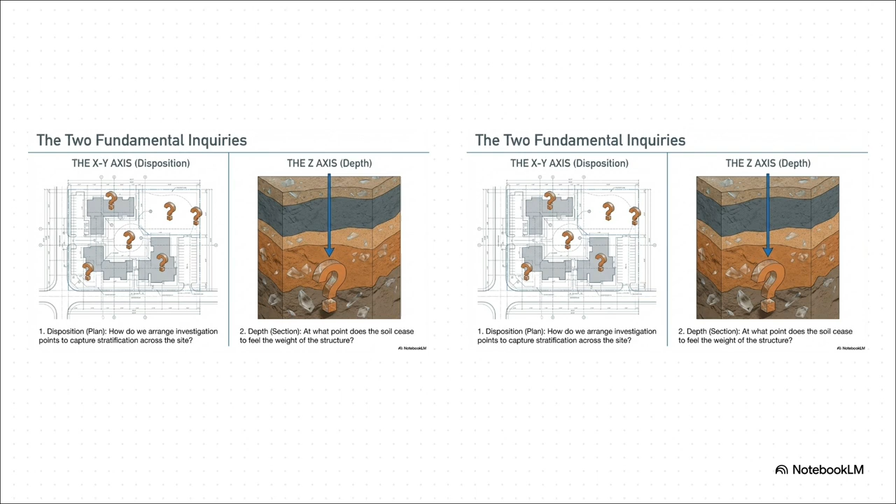And this is where the standard just brilliantly cuts through all the complexity. It boils everything down to two basic questions. First, you've got the XY axis, which is basically the bird's eye view of the site. Where exactly do we look? And second, there's the Z-axis, the cross-section view. How deep do we need to go? Simple as that.

So here's our game plan for this explainer. We're going to follow that exact logic. We'll start by defining the problem. Then we'll tackle the XY axis to figure out where to investigate. After that, we'll get into the golden rule for the Z-axis to see how deep we need to go, check out how that works in the real world, and finally, pull it all together in a super useful tool I'm calling the Investigator's Matrix. All right, let's get into it.

Just remember, we're taking what seems like a complex, three-dimensional geological puzzle, and we're breaking it down into a super manageable two-step process, location and depth. First up, let's talk about the surface plan. So this first part is all about strategy. This isn't just about digging random holes and hoping for the best. It's about being smart and placing our investigation points based on the specific type of project we're working on.

Now, for a small site, like a single house, the logic is really clever. Sure, you put one investigation point right in the center, where the main load is going to be. But you also check the corners. Now, why would you do that? Well, you're looking for any sloping or dipping soil layers that could cause some serious stability problems down the line. It's a simple but crucial check.

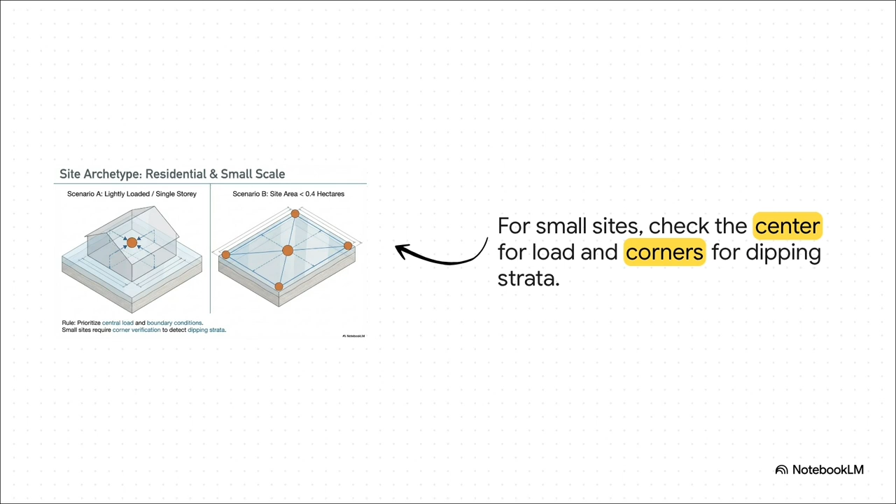Okay, so as the site gets bigger, our strategy has to scale right up with it. For these large developments, think big apartment complexes or industrial parks, we switch over to a systematic grid pattern. This makes sure we get full coverage, with boreholes no more than 50 meters apart. The whole point is to create a reliable underground map and avoid any nasty surprises hiding between our test spots.

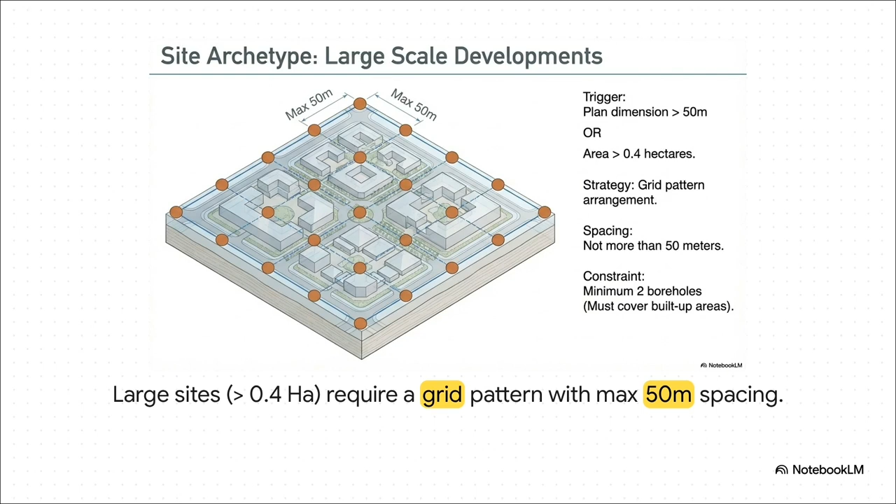But what happens when we start building up? Well, the risk just changes completely. With high-rise buildings, the loads are absolutely immense, and they're all focused on a small area. So, once a building gets taller than 50 meters, the standard says you need a minimum of 3 boreholes. This isn't just about covering the area, it's about data redundancy, making dead sure our understanding of the ground is rock solid.

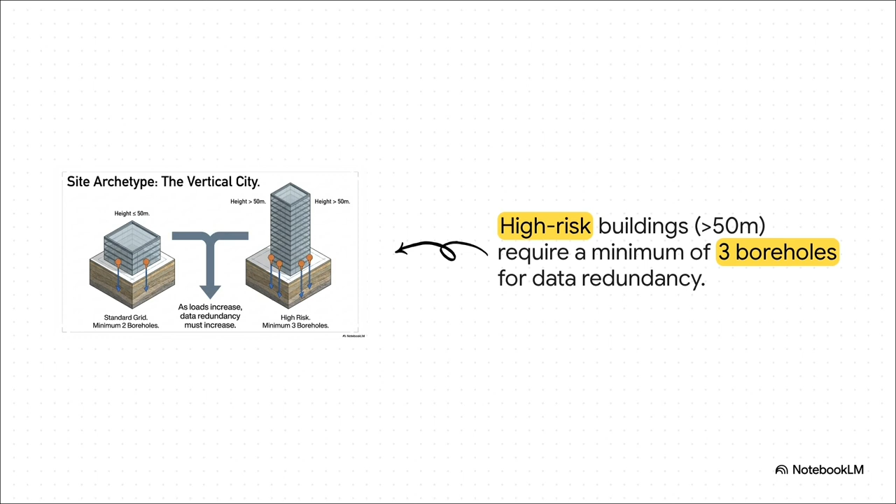Now, projects like roads or railways are a whole different ballgame. The investigation has to be adaptable. You see, if you're on nice, uniform ground, you can space your points out, maybe up to 500 meters apart. But the second you hit weird or tricky terrain, you have to tighten that spacing way up, sometimes down to just 50 meters, so you can track those changing ground conditions really closely.

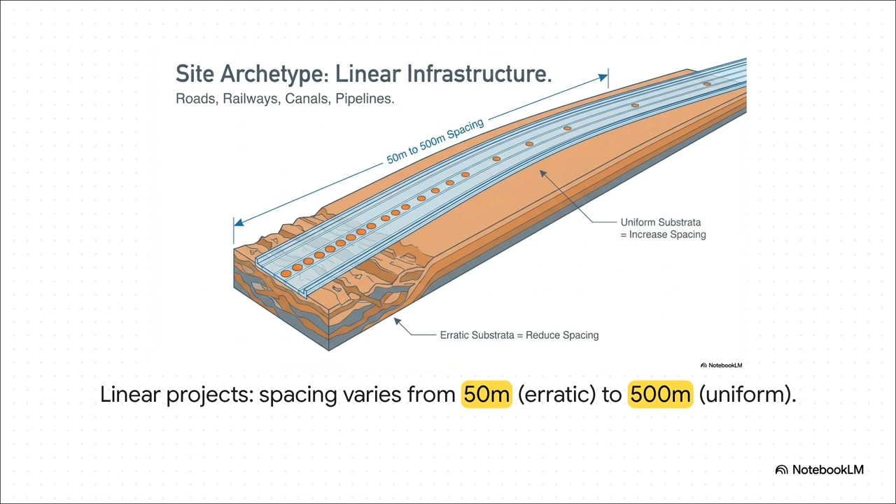And then you have these special cases, like huge solar power plants. Here, the strategy shifts again. It's really all about the massive area they cover. So the standard uses a density rule. 1 borehole for every 2 to 5 hectares.

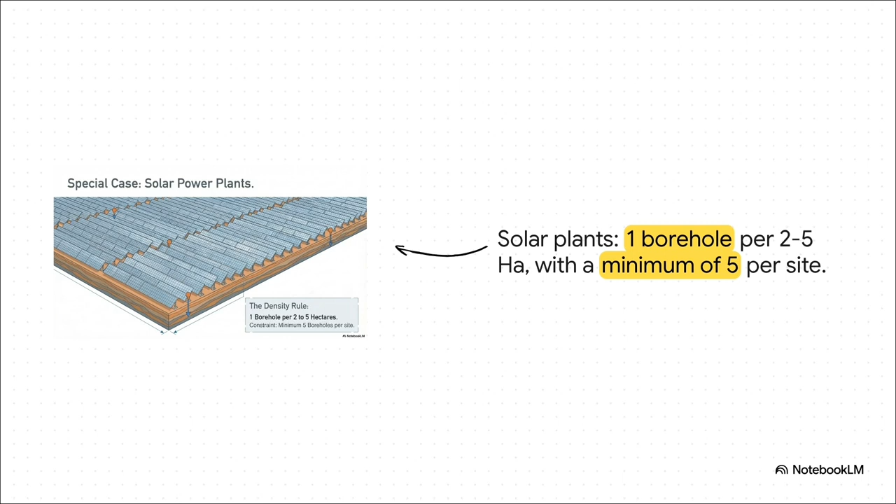But, and this is super important, there's a non-negotiable minimum of 5 boreholes to make sure you have a good baseline understanding of the site. Okay, so we've pretty much mastered the XY plane. We know exactly where to put our drills. Now we have to pivot to that next critical question. Once we start drilling, when do we stop? How deep is deep enough?

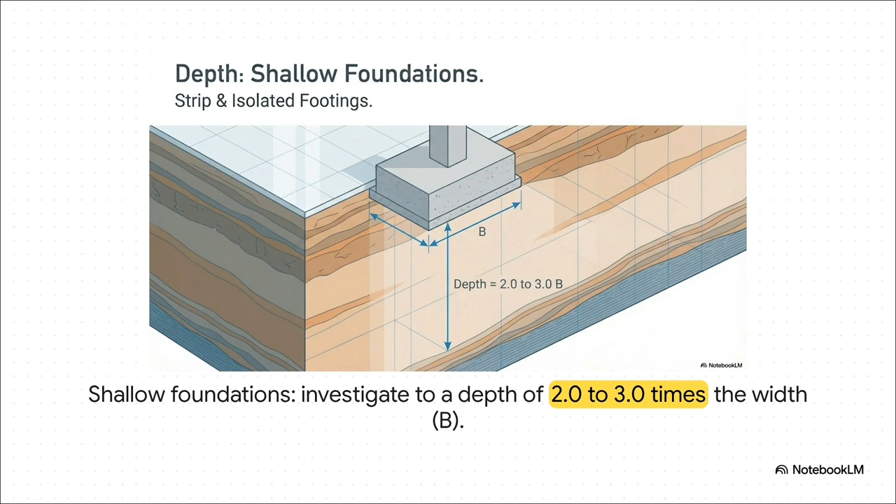So, that's the theory, which is pretty neat. But how does it actually work in the real world? Let's take a look at how this rule translates into some simple, practical guidelines for the most common types of foundations. So for the most common kind of foundation, a simple shallow footing, the rule is really straightforward. You just take the width of the footing, we call it B, and you investigate to a depth of 2 to 3 times that width. That's it. It just makes sure you've explored that whole pressure zone for that specific foundation.

Now, when we switch to a big raft foundation, that spreads the building's load over a much wider area, so the ratio changes. Because the stress isn't as concentrated, that pressure bulb is proportionally shallower. So for these big rafts, the investigation depth is usually just 1 to 2 times the raft's width.

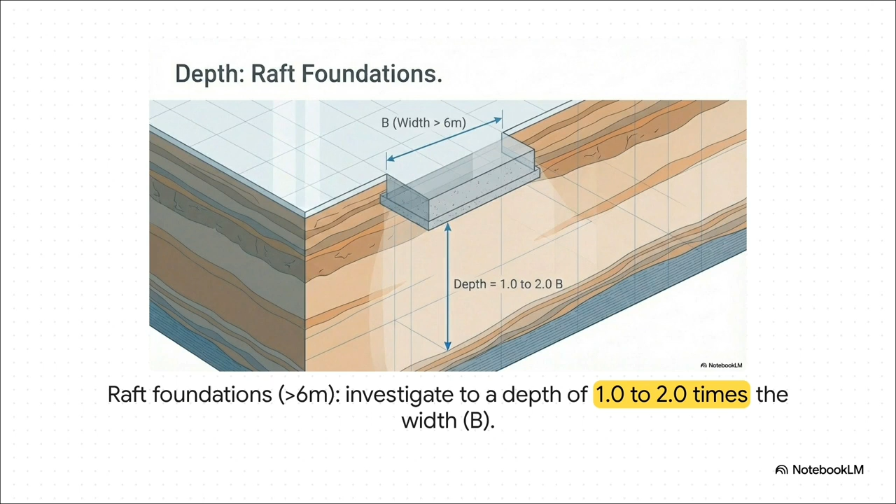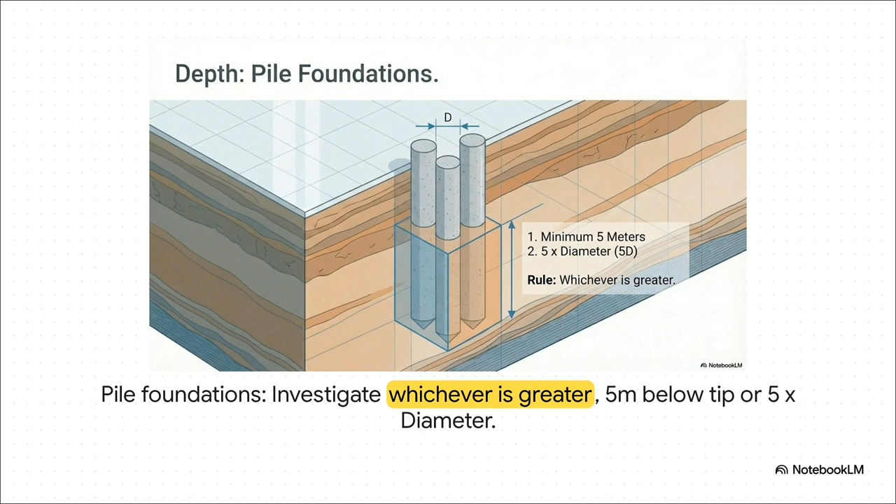Okay, now for deep foundations, like piles, which are designed to transfer loads way down to stronger soil layers. The rule is all about making sure you know what's below them. You have to investigate to a depth that is the greater of 2 options, either at least 5 meters below the tip of the pile or 5 times the diameter of the whole pile group. This makes sure the piles are actually resting on something solid and not just on a thin, strong layer with mushy stuff hiding right underneath.

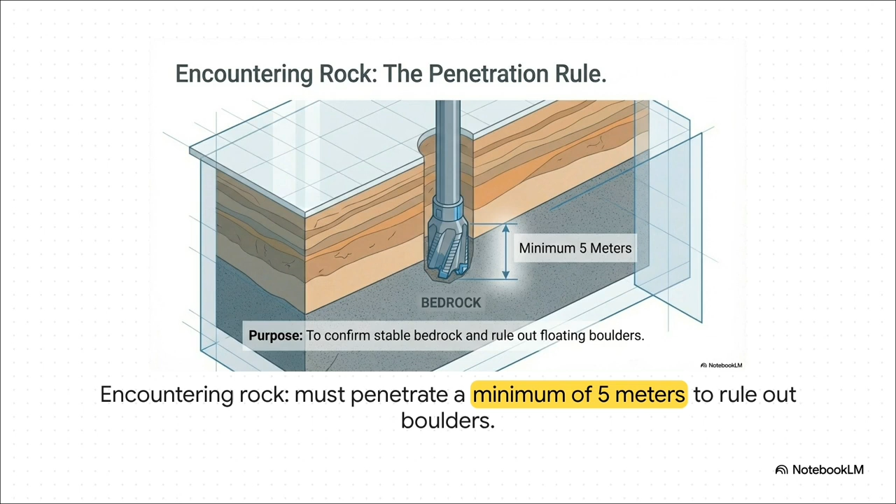But what happens when you finally hit rock? Well, you can't just stop and call it a day. This is a critical safety check. You have to drill at least 5 meters into the bedrock. Why? To prove that you've hit a solid, stable formation, and not just some massive, floating boulder that could shift or crack under the load. This is one of those non-negotiable rules that prevents absolute disaster.

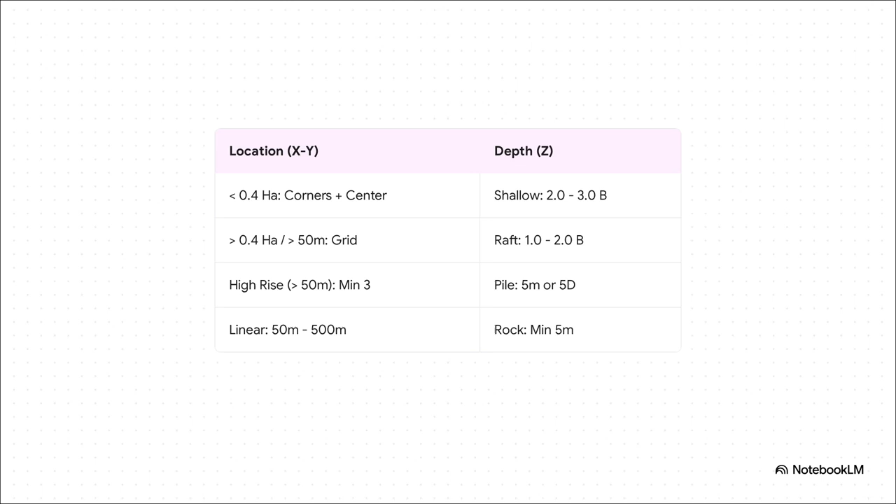You know, in the end, it all comes down to this one powerful idea from the standard itself. Every single rule we've talked about, from the spacing of boreholes to the depth of the drilling, is fundamentally about just one thing: managing the risk posed by the unknown ground right beneath our feet. So what does this kind of systematic approach to risk tell us about the future of engineering and design?